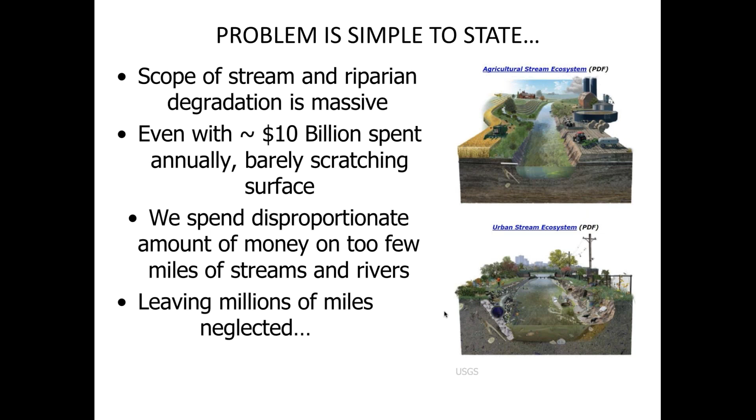And even though the sort of restoration industrial complex spends billions of dollars a year doing stream restoration, we're really just scratching the surface in terms of the numbers of stream miles addressed. Often because large, expensive projects on large rivers are the focus of a lot of the spending, but as a result, that leaves a lot of miles of streams neglected, just because most of the stream network are small streams where maybe those large approaches aren't necessary.

And so we end up with having a lot of the stream network across the whole U.S. that looks like this, easily identifiable as degraded in lots of different ways. And what we've lost is this, much more functioning, intact stream systems that have all of the natural processes that make up all of the physical and biological characteristics that we know of aquatic habitat.

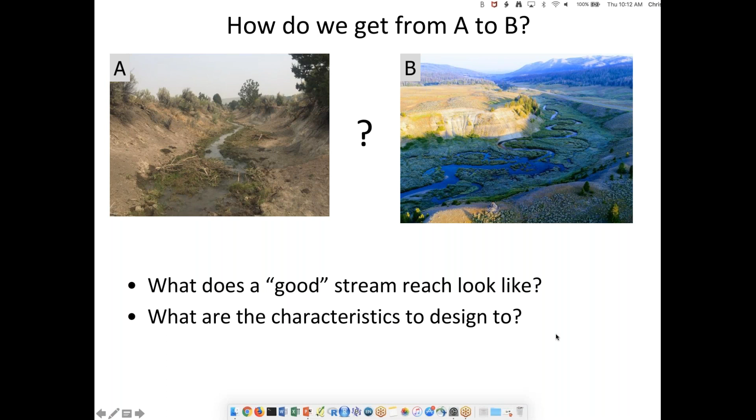So the question is, from a stream restoration standpoint, how do we go from this degraded condition, A, to B, what we think of as an intact stream, right? What does an intact stream look like? So what are your targets for restoration? What are your characteristics that you would give to a restoration design or a restoration practitioner?

So that's sort of our first task, is to ask, looking at a stream, is it in good condition or in bad condition? If it's in good condition, then you're tempted not to do anything. If it's in bad condition, then you're going to do something. And so this comes to our first poll.

I want you to look at this stream reach for a second, and then as a poll, we're going to ask you to say, is this in good condition or bad condition? So apply your lens of what you understand about functioning stream systems, the appearance of them. Look for the indicator that you use to judge good or bad, or the suite of indicators, and share that with everybody. So here's our first poll. Is that stream reach in that picture in good condition or bad?

So you have 30 seconds or so. I'm not giving you a middle ground. You got to commit, good or bad. All right. People voted.

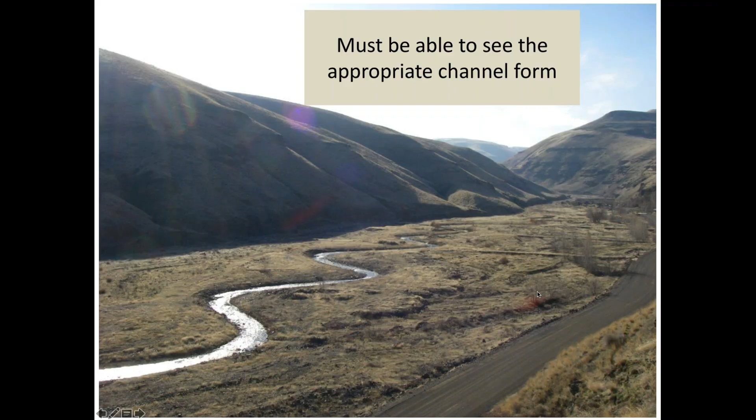So to be able to answer that, to think about that, and hopefully the collective answers will pop up on the screen, you have to be able to see what the stream condition is. So 75% of you said it was in bad condition. And so the kind of things that you might have keyed in on is a lack of riparian vegetation. It looks very simple. The other thing that I'd like you to think about, and maybe some of you grabbed this and some of you didn't, is what's the appropriate form for the channel in this place?

So here's what the river actually did with that restoration project. This stream form was a restored channel. A lot of money was spent to make this form, which looks like, in our mind's eye, an appropriate stream channel. It's got sinuosity, but for this particular place, the gradient and the bed material, it's an alluvial fan. A multi-threaded, very mobile channel is the desired condition, and the stream took care of that itself, right? And this is what happened to that restoration project, because that channel form was not appropriate.

And so when thinking about restoration, it's really necessary to understand what the natural processes are, and what the stream's desired natural condition is, since the river will be fighting you in every sense if you haven't gotten that right. Often restoration is approached as an engineering problem with very detailed designs, and the engineering criterion is stability. It's not going to be a gaining or a losing reach in terms of sediment, water, and habitat. What we think of as habitat features like pools and riffles are actually constructed, so that in a grading plan or a design, the idea is to put in particular habitat features.

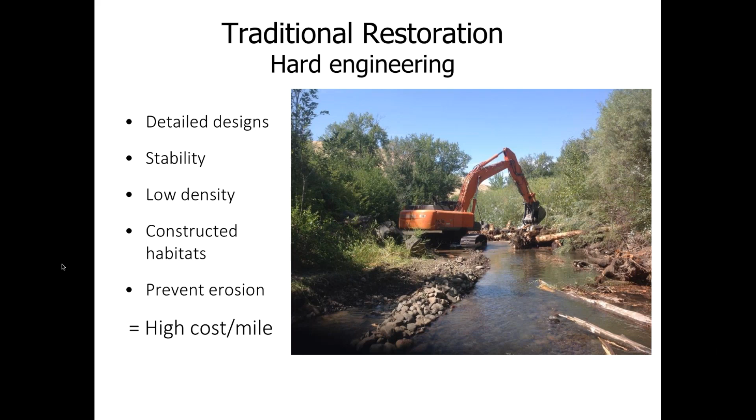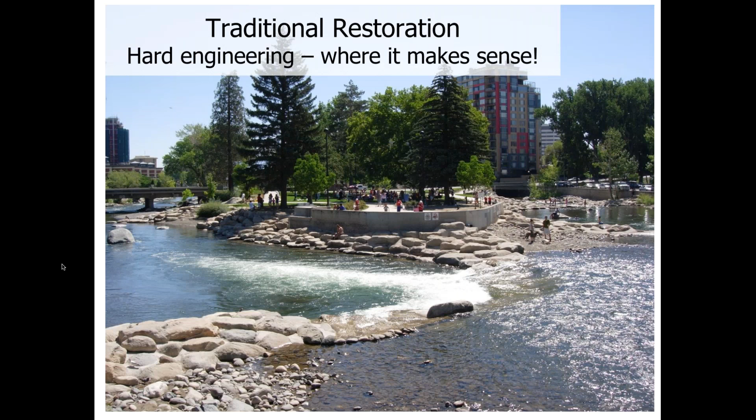And so you end up with this tension between what's the reason for doing, that is, you see an impairment, and what's the approach, that is, how do you approach the design and the implementation of restoration. So the language to try to address that in the restoration science world that's come to the front in the last 15, 20 years or so is process-based restoration. So it's the direct alternative to constructing features.

So the process impairment is the root cause of the problem, not just the impairment itself. And the restoration, adjusting that process, has to be consistent with the site. We saw an example of that with a reach that didn't want to be in a single channel because of its gradient, because of the material. And then the plan for restoration, the approach to restoration, has to be consistent with that site.

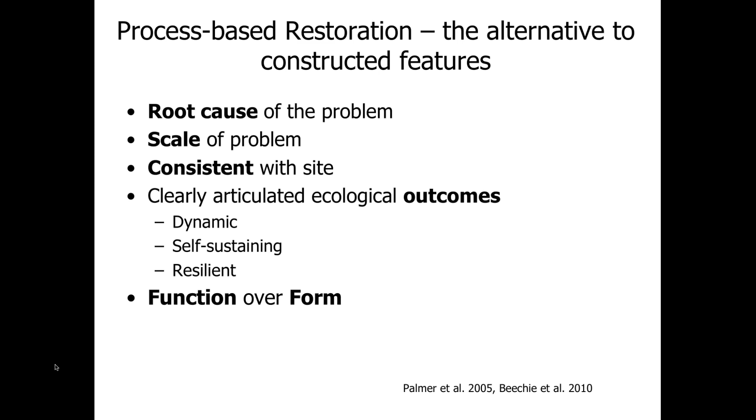And the outcomes, the expectations, then have to embrace what river systems are. They're dynamic. They're inherently self-sustaining in that they're a set of processes that move sediment around, that vegetation grows and senesces. And the basic idea is the stream restoration approach has to be function over form. And so a formal way of thinking about this is a channel evolution model. And here's an example of one of them from Cluer and Thorne.

And this is a channel evolution model that has gained a lot of use and application recently because of things called stage 0, which is the cross-sectional picture at the top, which is thinking of what a channel looks like in its completely functional form. And in most cases, we don't see this, because over the last couple hundred years we have impacted river systems so dramatically that there's very little of this intact form left.

But the idea of a channel evolution model really is a simple thought that the process of degradation, and therefore the process of restoration, is sort of a chain reaction. Something is disturbed. So going from stage 0 to stage 1, what has been lost is that multi-threaded nature. The stream channel has been simplified such that you disturb the transport deposition process, making it more of a transport reach, which will cause downcutting, because you've concentrated the energy from a multiple threaded channel into a single threaded channel.

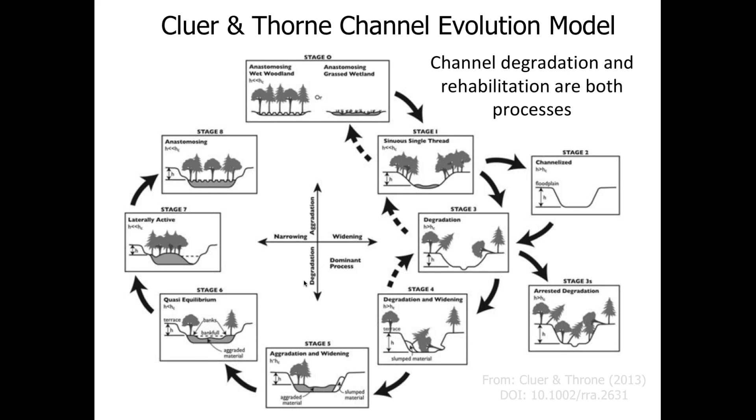So the solid arrows going clockwise are a set of degradation processes until you start heading up from stage 6, 7, and 8, whereas the dashed arrows going counterclockwise in stage 1, 2, and 3 are changing those processes, reversing those processes. And so this is the fundamental difference between constructing habitat and doing actions that impact processes to try to change the evolution, sort of the time history of a reach.

And again, not having this engagement process, you can't shout out the answers. You can shout it out to yourself in your office.

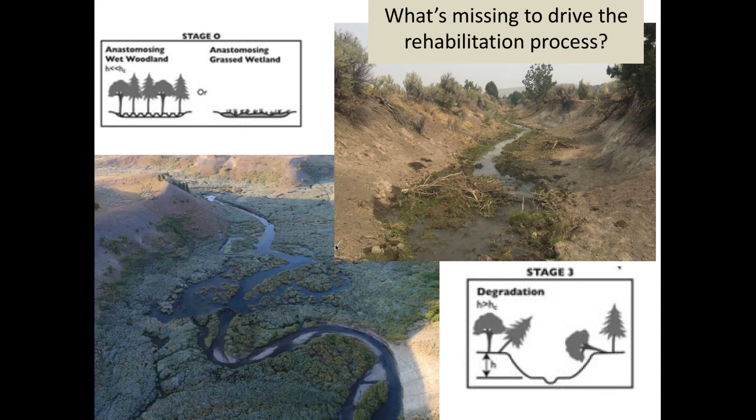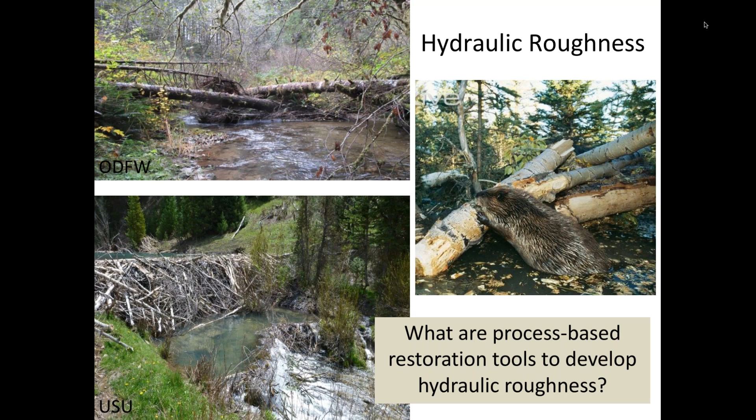And the idea is, how can we do this process-based restoration to develop hydraulic roughness? Can we have actions that are addressing this process in terms of changing the way the water interacts with the valley floor, how water and vegetation interact, and how sediment, whatever substrate is being moved, how that is sorted and stored, and the distance it moves?

So I'm going to talk about two techniques: beaver dam analogs, that is building a dam, biomimicry, acting like a beaver or a colony of beavers by building a dam, or post-assisted log structures, that is building a tree that's fallen in. And both of these we call low-tech structures because the technology is hand power tools. Wood that's used is wood that 2 or 3 people can carry. You don't need helicopters or

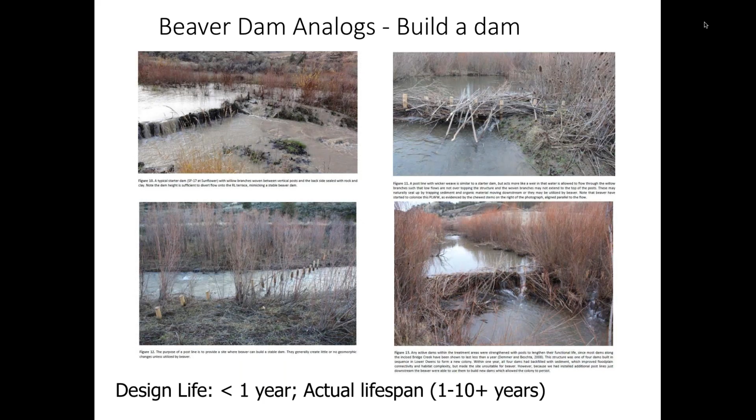large Tonka toys. As a result, the structures that you might build, so on the right-hand side are 2 examples of a post-assisted log structure, and here are 4 different examples of beaver dam analogs. These look very different from the restoration structures that the history of stream restoration has been dominated by. And again, they're not meant to build a habitat, they're meant to build a structure to change processes in a stream.

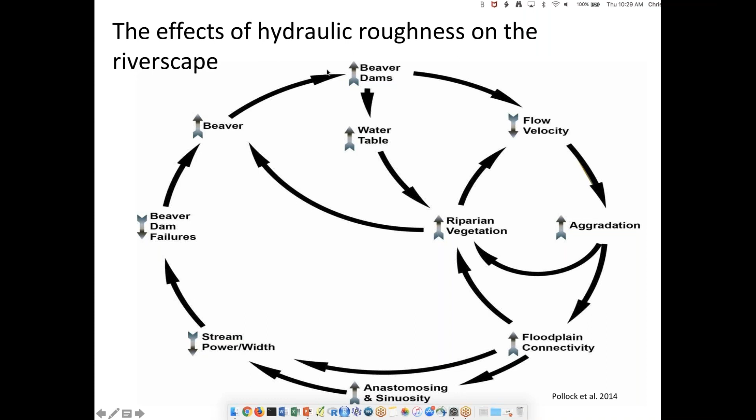Okay, so however, it's not all fun and games if you are mimicking beaver or actually actively engaging with beaver in stream restoration, because beaver can be pests, right? They can block culverts, which can back water up onto roads and fields, into residential areas that impact infrastructure. They are active foragers on vegetation. So if there's vegetation, whether it's ornamental or orchard trees in the area, beaver love to eat woody vegetation, and that may be an issue for the proximity of the project to human land use.

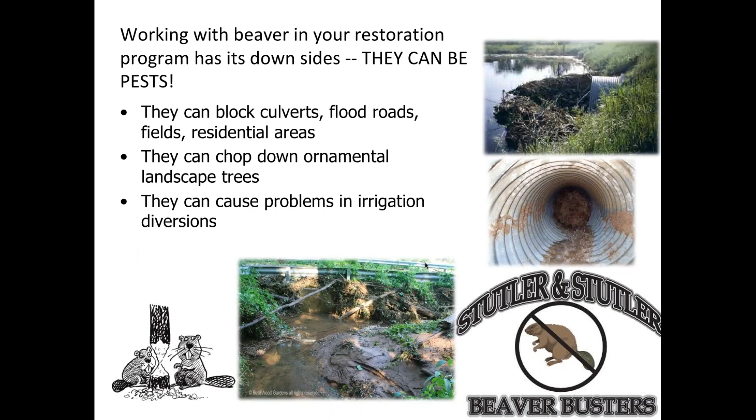And so as a result, there are many people, many companies, and parts of the federal government that will come to the rescue with lethal solutions to remove the beavers. But in removing the beavers, they're removing all of the things that beaver and beaver dams can do to change stream processes. So if you're going to do beaver-based stream restoration, anything that might encourage beavers either actively or indirectly, you need to have a suite of actions at your fingertips to deal with it.

So there's conservation and promotion issues in terms of engaging with how to maintain populations, and that's engaging with state and local entities for either addressing lethal removal or trapping closures, for example, in whole watersheds. There's many methods, and we'll talk about a couple, for living with beaver, that is allowing beaver to be in your restoration area. Translocation, if you want animals, is bringing animals from problem areas or problem animals into areas with suitable capacity, as well as restoring riparian vegetation, which is making food for beaver, so then understanding how you have to protect that.

And then the last things that we've already been talking about, which is sort of mimicking the beaver dam building in streams with beaver dam analogs, as well as the hydraulic roughness elements that BDAs and PALs present. So poll number 3 is, have you and your entities, your agencies, engaged in any of these other forms of beaver-based restoration that are either direct or indirect, as you have beavers in your watershed, in your restoration areas? Either you're encouraging them or you're trying to work around them.

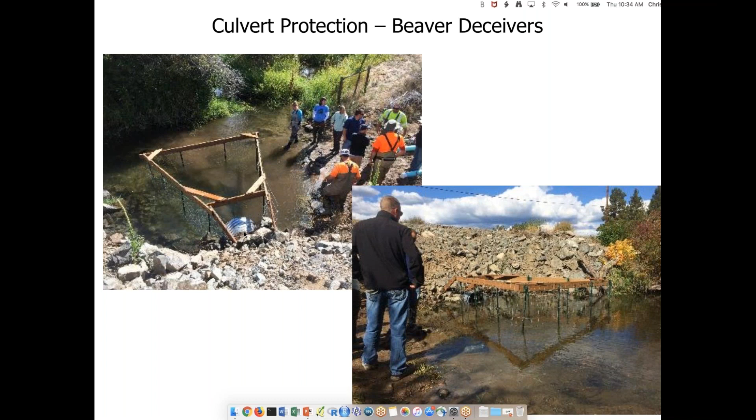So how do you protect that culvert mouth then? Well, it's really just as simple as keeping beaver away from it. And the fences don't actually have to attach to the bank. They need to be enough of a deterrent. It needs to be large enough that the flowing water sound here is less of an attractant to the animals to say that there's something to dam. The large area like this allows a lot of debris to rack up, but still lets the water make its way through the culvert so that this caging around the culvert mouth doesn't become just as much of an issue as any kind of debris accumulation in the culvert mouth. And these are really, really effective. They're cheap and really effective when beavers are focusing on a culvert and when culverts are undersized.

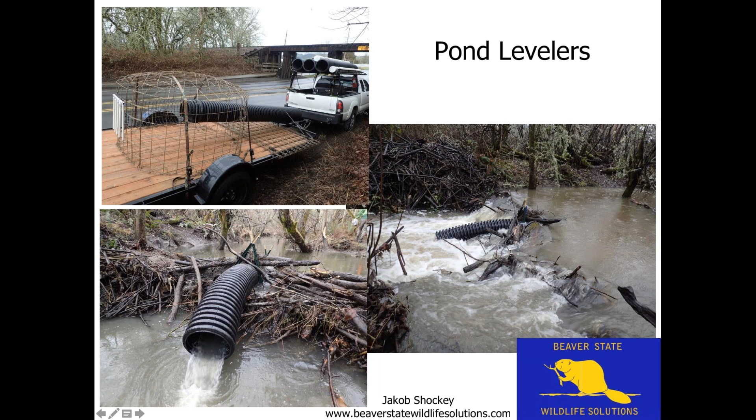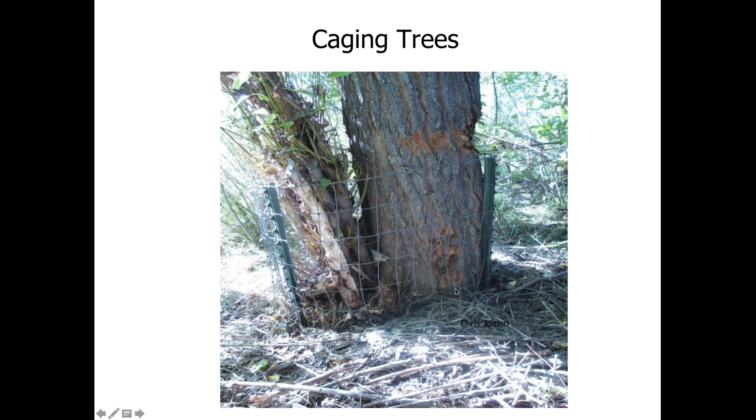A third example is caging vegetation. We talked about beavers' habit of eating trees. Here's cottonwoods that were caged when they were first planted. This is not a great example of caging, and here's the reason why. Eventually the tree grows to the size of that cage, and in this case, beavers even piled up material on the edge so they could climb up over the cage and then cut down the tree. So this is a good idea in terms of caging, but a poor implementation, and I call it caging with quotes, because animals were able to figure out that there was food inside the cage and then figure a creative way to get to it.

If the cage had been set back farther, that would have been fine. Or if there were more trees in this area, so in a sense, having a standing crop of vegetation, they wouldn't be so focused on the few cottonwoods that are in this entire reach.

So this is what we call a beaver-dominated landscape. They have fully taken control of the hydraulics of this stream system, and it was triggered by bringing animals in through translocation, and then giving them a jump start by putting in a couple of artificial beaver dams, beaver dam analogs, to get them going.

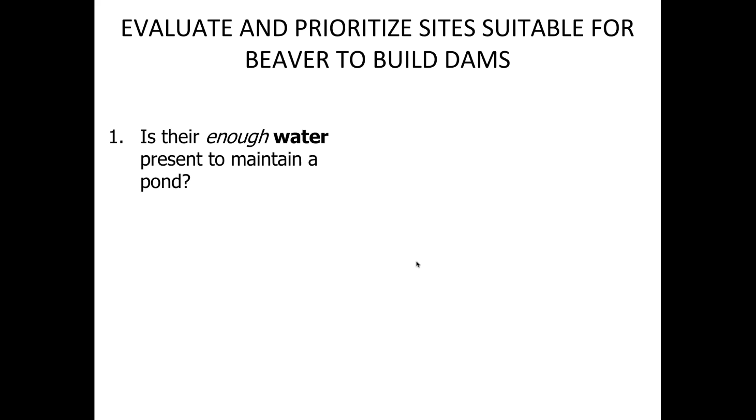Okay, so to do any of this kind of work, you need to do it in the right place. So we talked about process-based restoration. The four key things to think about are: is there enough water to maintain a pond? If in any way you want beavers involved in the restoration, then you have to make habitat suitable for them. Is there enough vegetation, enough food, both to support their foraging as well as dam building, realizing that in lower elevation, warmer areas, they do not need woody vegetation. They can survive off of emergent vegetation, cattails, in a sense grazing on just green, non-woody vegetation.

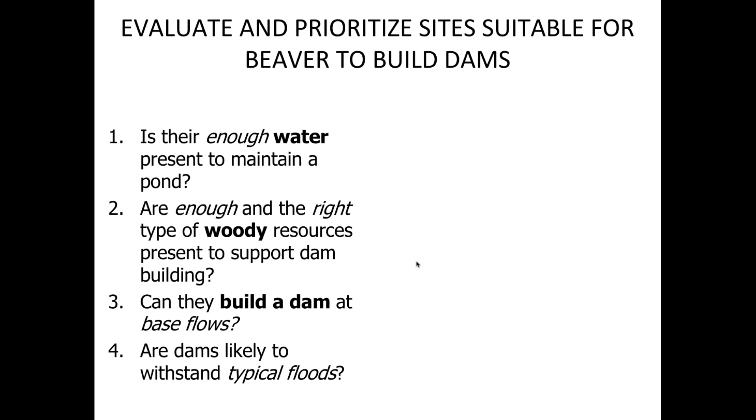But in places where they do need to make food caches through the winter, woody vegetation is necessary for their diet, and certainly it's necessary for structures for dam building. Can they build a dam at low flows? That is, is the stream or river too big? Then they're not going to be able to build a dam. And would those dams likely withstand typical floods, like the 2-year recurrence interval?

And there's some nationally available GIS level information to get at these questions, right? So with the stream network, the 1 to 24K perennial network gives you an idea about where there's a minimal set amount of water. There are vegetation coverages, so things like LANDFIRE, and then USGS, either from gauges or building regional curves for your watershed, you can get some base flow statistics to get at the base amount of information, and estimate Q2, the 2-year return interval flows.

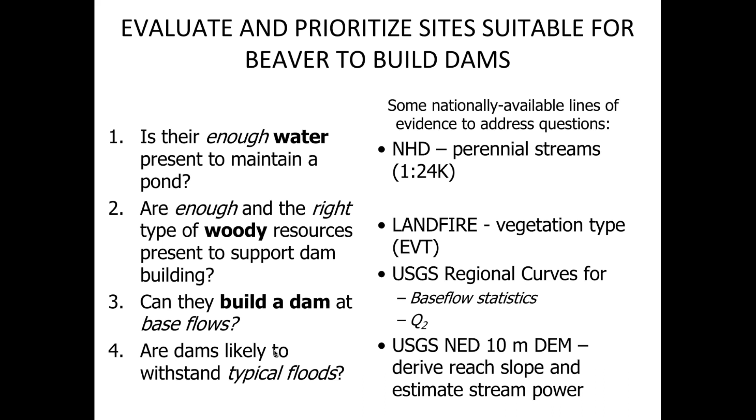And using DEMs, estimate the stream power, which is just the discharge in the stream and the catchment area, as well as the local slope. And there are some rules for how to take these characteristics and estimate the dam density, or whether you expect dams to be there at all. But these are the 4 questions that you need to ask yourself if you're engaging in a site that's going to be either supporting beaver dams or using beaver dam equivalents, or that biomimicry. Is that the right kind of tool to change the processes there?

So let me just dig in a bit more on these 2 structure types. So BDAs is beaver dam analogs, and PALs is post-assisted log structures. So a BDA is a really simple thing. It's just fence posts, a non-treated fence post 3-4 inches in diameter, driven into the stream bed. The height of those posts sets the crest elevation of the structure that you're building. The material that's made up of it is local material, just willow, or we've used juniper or sagebrush.

You may need a little rock or mud at the base to seal up if you want this to function at low flow. The spacing and the depth of the posts really depends on the stream flow, but on the order of 20 to 50 centimeters apart, and probably 50 centimeters max for your full height of the structure. And if you're impounding water and you want that effect to spread out, then run.

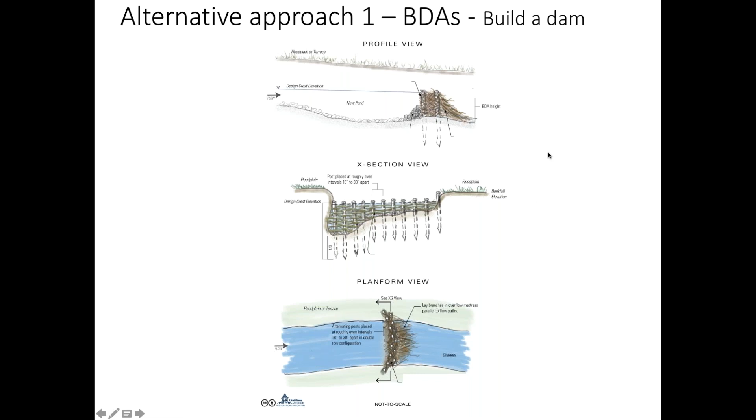In this case, it's being built in a trench. But if your crest elevation is near the floodplain or above the floodplain, running your post lines out onto the floodplain is also appropriate, so that the water's not getting up and going around, unless you're trying to cause an avulsion event, which is another thing to do to trigger changes in stream processes. Here's just 4 names of different types of beaver dam analogs that we've given.

You can do this in any combination. There are manuals to help you think about it, but certainly there are no rules. It's just your creativity. Basic starter dam just sets posts with a little bit of material in them. You can see it's immediately starting to impound water. In some cases, you might think of just putting in posts and letting whatever debris accumulate, so that this would not be immediately acting, but it would act as high flow events move stuff around. Actively weaving in material, in this case willow, to immediately make a dam.

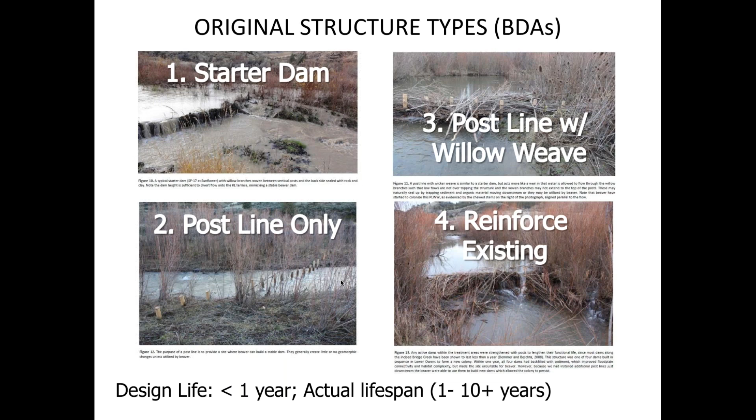And in some cases where you've got existing dams or abandoned dams, adding posts to existing dams can reinforce them and add to their lifespan. And here's just an example of one. This is in the lower John Day in Bridge Creek in Central Oregon, a starter dam kind of an approach, and a lot of material has racked up on it as well. And you can see that it's impounding water.

Post-assisted log structures, again, the same kind of technique, using a handheld post pounder, driving posts into the substrate. But the idea here is rather than build a structure that's acting like a dam, it's building structures that have other purposes, really just the same purposes you would put anything like wood in a channel. But in this case, the wood is not going to stay there without a little bit of help. And so it's really just being pinned.

So these are pieces of wood that you can carry. This is wood that's salvaged nearby, or bringing stocking material in, and then pinning it down to the substrate, either attached to a bank or in the middle of the channel, to put some hydraulic roughness into the channel. So here's just two techniques, and here's some examples of those. So here's a channel spanning wood structure. It's not meant to impound water, but it's meant to catch things that might be moving down or cause flow to deflect around this channel.

Here's a bank-attached one. It's strongly attached on one side, but leaving a little jet over here, which is meant to do erosive work. Here's a structure in the middle that's meant to split the flow. And then here's, in a sense, taking some of that material and just putting it in the channel, a place that you want it to be recruited nearby.

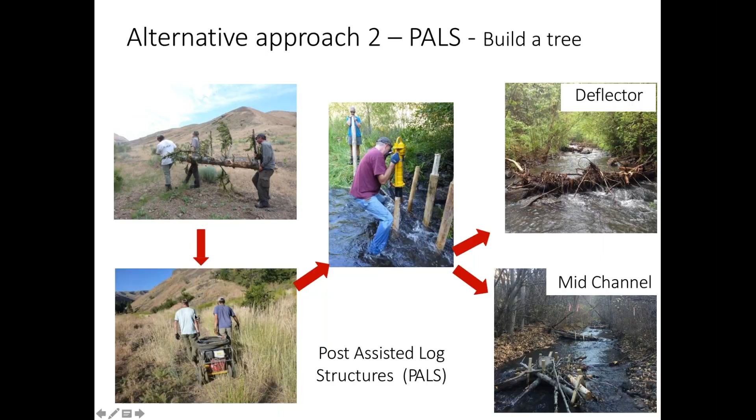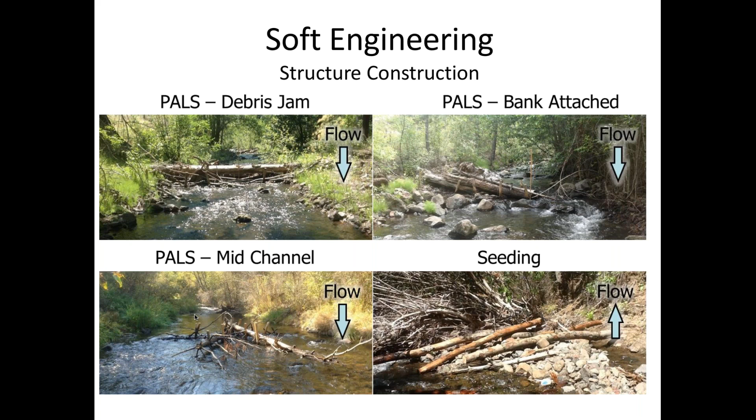Great, thank you. There are a couple other questions. Yep. One from Jim Brick: can you touch on the number of BDAs that should be used and the distance between the BDAs? Yep, that's the next section right here, so I will hopefully answer your question, but let me know if you still have more. There are a couple other questions. Should we come back to those since Jim's question is? Yeah, go ahead, just in case we don't have to back up too much on the slides. I don't have many more slides. I'll show you some more pictures of implementation of these.

Great. Is there a preferable reach type to place the structures? Glide, pool, riffle, and/or a preferred gradient? Yep, those are good questions. I'm going to let that slide a little bit, so see some of the pictures and some of the rationale when I talk through the design. But any place that you would think a stream impairment exists because there was wood or beaver dams in the stream is appropriate.

So from 0.5% to 8% in terms of gradient certainly are places where we've worked. In really, really low gradient areas, you're not doing a lot of sediment sorting by changing the hydraulic roughness because there's not a lot of energy. So 0.5 to 1 to 2% is most of these areas, but certainly steeper areas are possible. Wherever you can imagine beaver dams or wood doing work, then it's appropriate to do work like this.

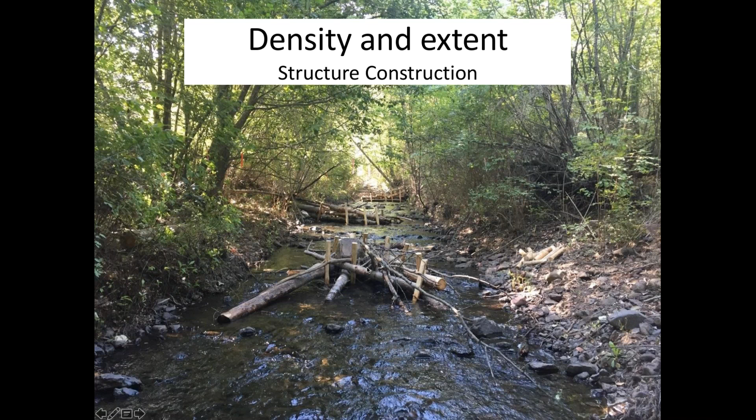And so in the system, you can see the kind of density that was appropriate. These are 20, 30 meters apart. And here's an overhead shot, so there's 1, 2, 3, 4, 5, 6, there's another one here, 7 that are seen from this overhead photo. These are less than 50 meters apart. And so the idea is where you'd expect something in that channel, that kind of density, that's how these are going to be effective. They're very sort of short-term effect. They're going to cause an effect just immediately downstream, and so you're going to want another one that causes an effect sort of within the shadow. And I'll show you some pictures of that.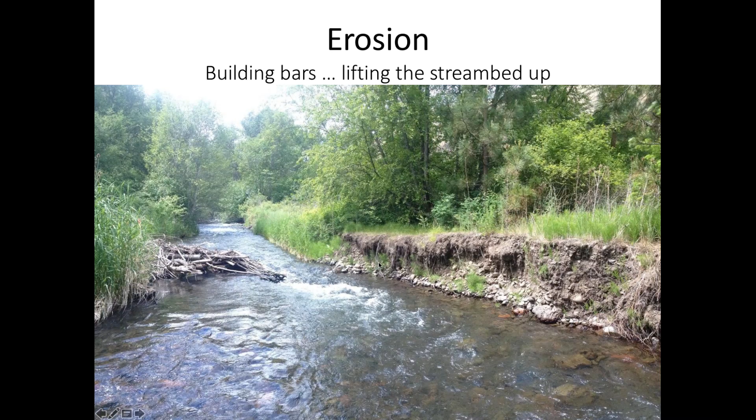Here, this structure was recruiting sediment that's in the channel. This structure has the objective of recruiting sediment from the bank. And so if you want to then have monitoring, you can use simple photo points, just looking upstream, and say, okay, have I actually recruited any sediment? Or here, on this one, it's very easy to say it's successful, that this structure did its job. It's easy to see this structure hasn't done its job, but you also understand that whatever sediment was moving down was recruited by this one, and there wasn't any left by the time you got here, right?

And so as this fills up, now this one is going to start having that hydraulic effect that this one did. So that's why you have to have them in sort of a high density, and that's why you think about them all together. Now, there are lots of other things that are going to happen as a result of this, but your simplest response that you can talk about, that you can design to, is that first order response. What are they going to do initially? Rather than saying, okay, eventually this is going to cause channel aggradation, we're going to recruit this vegetation, we're going to get channel lengthening. All of those things can happen, and those are all the processes that are triggered. But I would focus on what your immediate expectation is, because these tend to be fairly quickly acting responses, and that it's going to trigger a longer change in the channel.

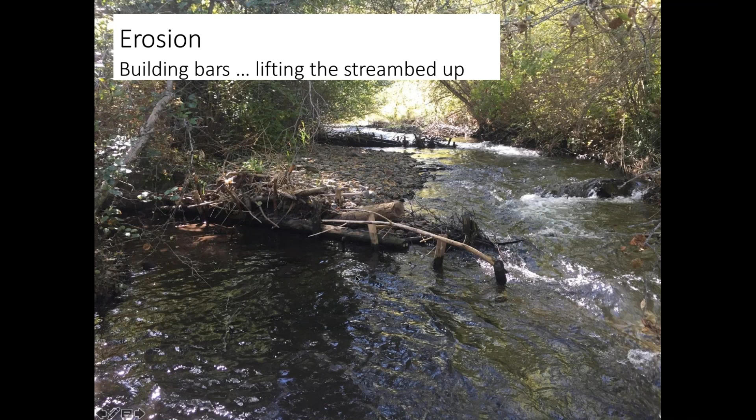And so this example here, where we looked at over 10 years to see this before and after, that was not immediate. That did take 10 years for this channel to slowly aggrade, to start activating other places, for beaver to come in. And so our goal initially was channel aggradation in this channel, hoping that we could get to this point, not imagining it would happen in less than 10 years, but not saying that this was our final objective from the implementation. Implementation at each project was aggradation and making the water more likely to engage with the floodplain. That happened, but that happened after multiple steps. So I think it's biting off each piece as you go in the design and your assessment, and having that bigger picture goal as a long-term part of the project, but you have a short-term response that you're arguing for and watching for.